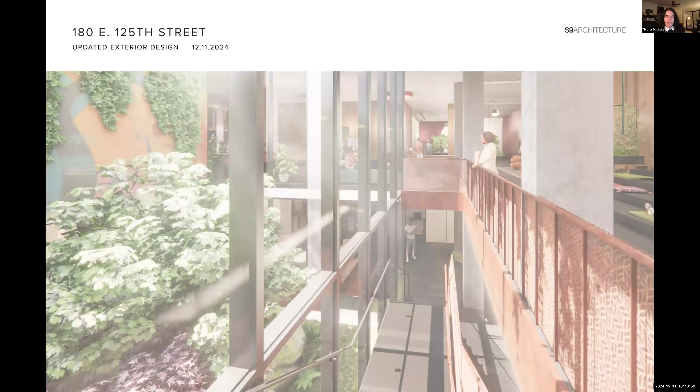Hopefully this is working. But yeah, we can see it. Okay, great. So we're very excited to be here tonight and to walk you through the design of where we are.

To locate ourselves, the site is on 125th Street, bound by 3rd Avenue to the east, bound by 124th Street, and the block extends between Lexington and 3rd Avenue. We're really in the middle of a bustling neighborhood here — restaurants, shops, cultural institutions, lots of residential, lots of foot traffic. So we want to respond to all these elements and think about how we design a building that has an identity and fits within the surrounding environment.

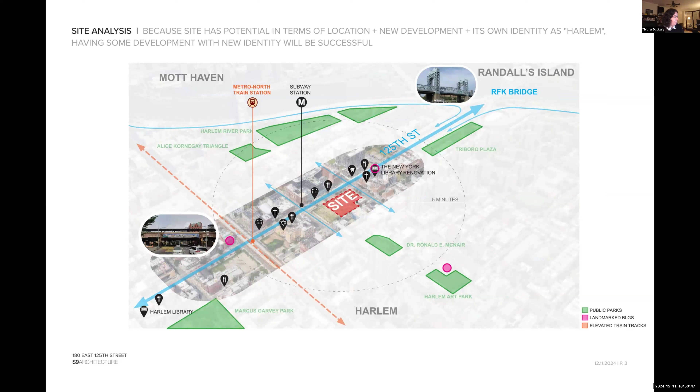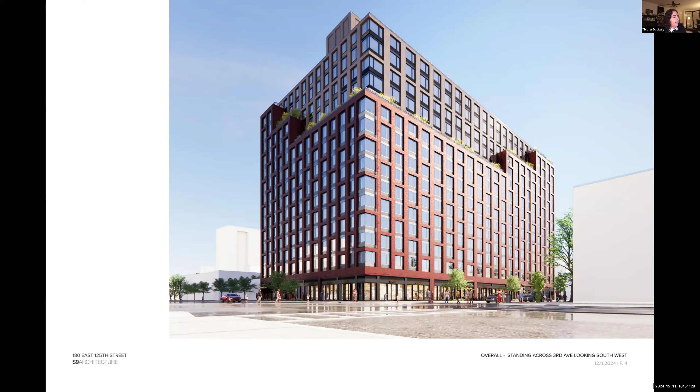Here is a view of what we came up with. This is an overall rendering standing on 3rd Avenue, looking south at 125th Street and 3rd Avenue. The facade is predominantly made of brick, and we're trying to express the energy and vibrance of the surrounding neighborhood by designing a pattern of dancing windows and stepped setbacks that wrap around the building.

Moving over, this is a view from Lexington, looking at 125th Street, looking east. Our site is adjacent to the MTA lot, so we're going to have lot line walls that will be exposed. We're looking to treat those lot line walls with artwork, large scale murals, and we're looking to commission local artists for this job so that we create walls that are additive to the neighborhood and the tenants within this community.

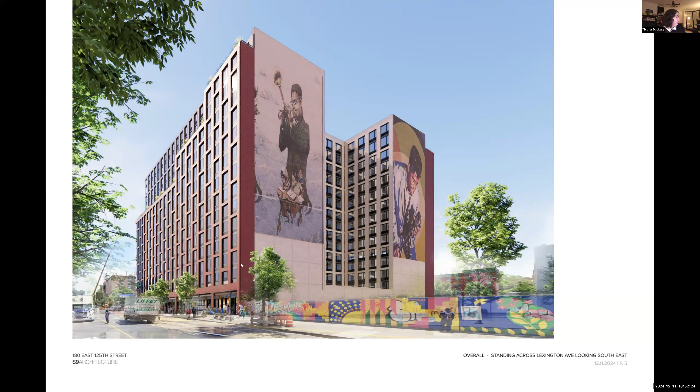Turning around, this is standing on 3rd Avenue, looking north. The corner currently has a 2-story fire department building. Here too, we have lot line conditions, and we're looking to treat these with murals commissioned by artists, if possible, as well.

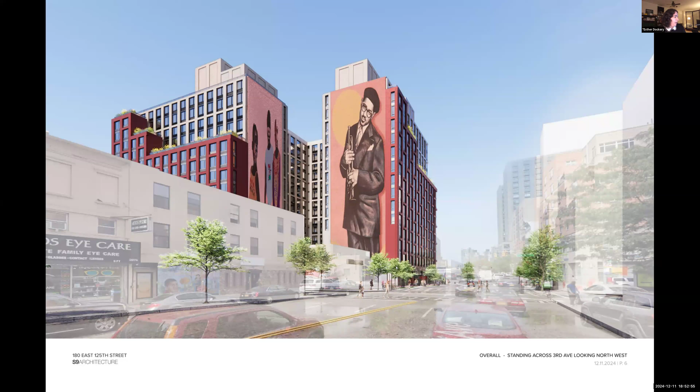Now zooming into the ground plane — the storefront is treated with metal paneling and lots of glass to create transparency. There's going to be signage across the street frontages and a louver band, and the brick piers will come down periodically to tie into the ground plane.

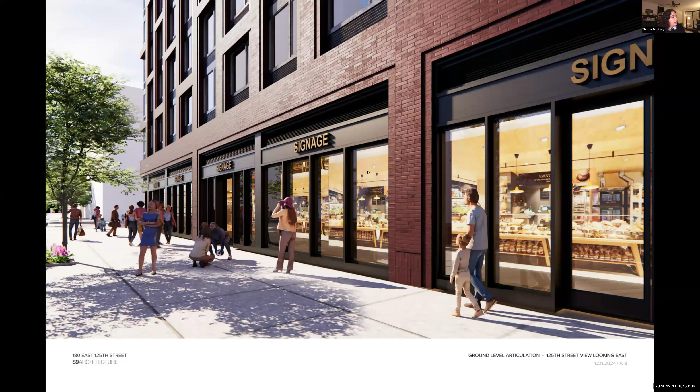Zooming into these storefronts, we're looking to articulate the detailing to create human scale. We're looking to create some setbacks and frame around the storefronts, play with the brick installation using soldier courses and stacked brick to add detail on the ground plane, and as we take the brick up the course of the building, we're looking to add detail in that way as well.

Further down on 3rd Avenue, the residential entry — we're looking to set it apart from the commercial portion of the building, make it distinctly residential, but still tie it into the rest of the design. We're considering including some landscaping to mark the residential entry, making it more private and distinguishing it from the commercial portion of the building.

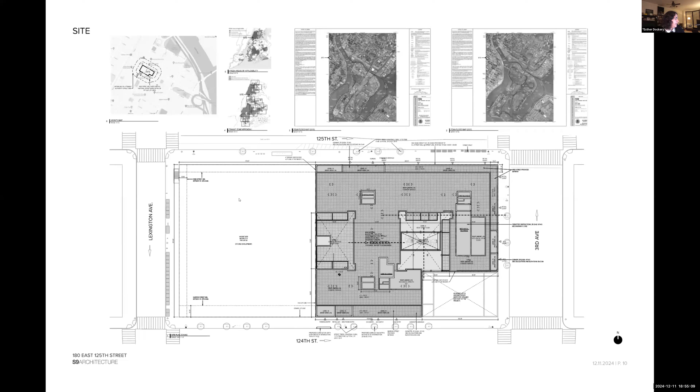Okay, next I'm going to walk you through the plans. This is a site plan, locating our project along 125th Street and the corner of 3rd Avenue. South is 124th Street. We have the 2-story fire department, and the MTA lot to the west.

Zooming in on the ground floor, along 125th Street we have retail, which wraps around onto 3rd Avenue. On the southern portion of 3rd Avenue, abutting the fire department, will be the residential entry. Part of the retail component will be a fresh food store, approximately mid-block on 125th Street.

The residential lobby and amenities are arranged around a sunken garden, located on the cellar level and open to the sky. This allows us to bring in a lot of natural light for the amenities and residents in the building.

Along 124th Street, we have the mailboxes and bike storage, service entry for the building, loading for the supermarket, and the ramp that leads down to the parking garage.

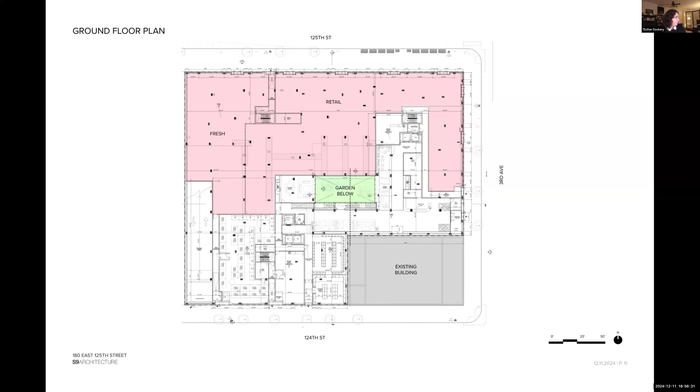Here's the cellar floor plan. We have attended parking of approximately 100 or so spaces. You can see the garden located at this level, open to the sky, bringing natural light into the heart of the building, with residential amenities arranged around it, as well as some back-of-house program needed for the residential.

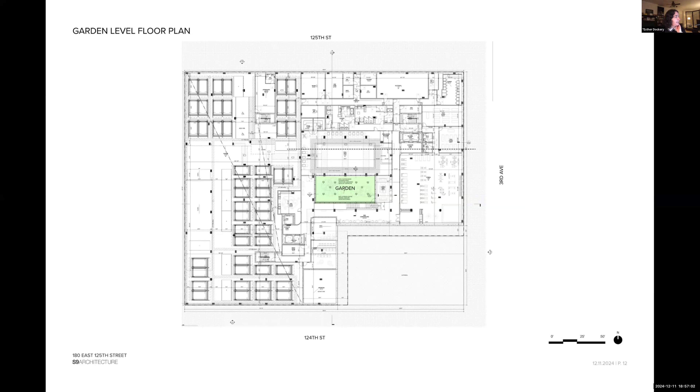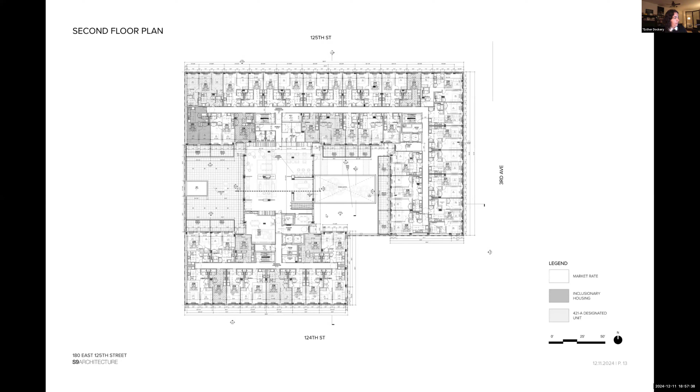Moving to the second floor, this is the first floor with residential units, located on the podium of the retail. It has a large amenity space with access to one of these terraces, and you can see the opening to the sunken garden. Residential units start on this level, and units here will have some private terraces on the podium level.

Moving up through the building, floors 3 through 10 are our typical floors. Highlighted here are the inclusionary housing units—I'll get into that in more detail when discussing the unit mix. The units are arranged around two courtyards, providing light and air. As we move up, the floor plate gets smaller as we introduce setbacks above the maximum base height.

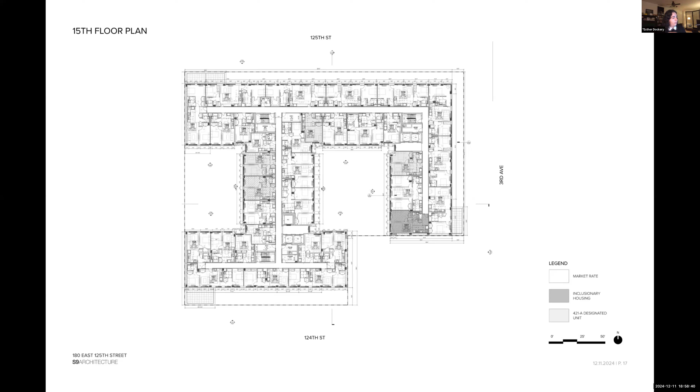Moving up further, this is floors 13 and 14, with additional setbacks. The top floor is the 15th floor, the smallest floor plate, but the inclusionary housing units are distributed equally throughout all floors, horizontally and vertically. Then we have the roof terrace with residential amenities throughout, as well as mechanical equipment as required for the building.

A snapshot of our unit mix: units are arranged within the 15 floors, on floors 2 through 15. We have a total of 614 units, of which 88 are inclusionary. It's a mix of studios, 1-bedrooms, and 2-bedrooms, totaling approximately 48% 1-bedrooms, 18% 2-bedrooms, and about 34% studios.

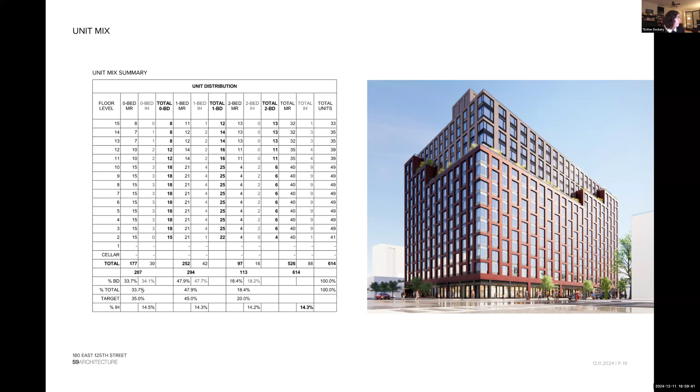And that concludes our presentation for today. With that, I'll turn it over to Jamal from the development team, and questions if there are any.

Just to give an overview, we're offering 185 total affordable units, of which 88 will be the inclusionary housing, set around the 70 and 80 AMI. To repeat: total affordable of 185 units out of the 614, and 88 of those will be inclusionary housing, set at the 70 and 80 AMI.

Thank you. Any additional parts of your presentation? Otherwise we'll turn to committee questions. Sorry, do you have any additional part of your presentation? Otherwise we'll just turn to committee questions. No, I could take any questions. Okay, thank you so much. Committee members, go ahead, thank you for your presentation.

I really appreciate the detailing on the building, it does make it feel human. I did want to bring up that when reviewing the plans, the 88 inclusionary units appeared to mostly, if not all, be interior facing. It seems like it would be more equitable to disperse them around so they have street facing views as well. We can definitely take a look at that.

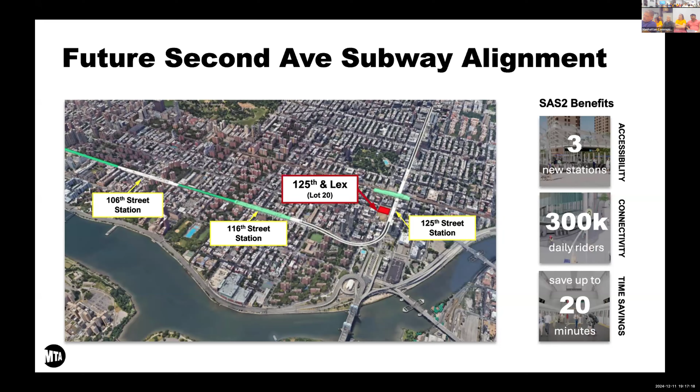That's really what my group does. We're investing quite a big sum of money, just under $7 billion, to build the Second Avenue Subway. What we want to do is not just build a subway, but also position our properties so that non-transit uses can come in next to them and over them.

We're also looking to engineer these structures so that we can build over them and next to them in the future. Right now we're working with our engineers to redesign these facilities where they need to be so that we can put housing and jobs next to them. Right now that's really what I'm here for — to look to entitle these properties, or get the zoning in place, so that we can move forward with future development, which won't happen for a number of years. So we don't have as many pretty renderings as the last presentation, but we want to show you kind of what we're thinking in terms of the massing.

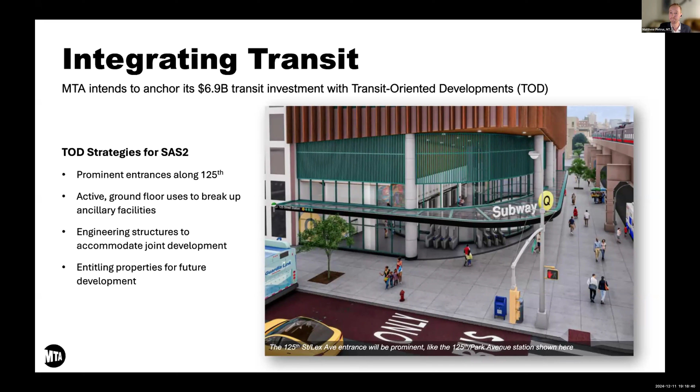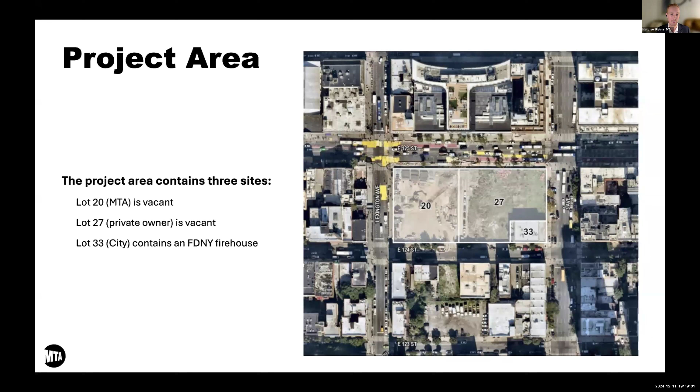So here's an aerial of the project area. I think most are familiar with the site, but this is on the west side of the block, bound by 125th, Lexington, and 124th. Lot 20 is vacant. Lot 27 we just saw a great presentation on, and lot 33 is the city-owned firehouse.

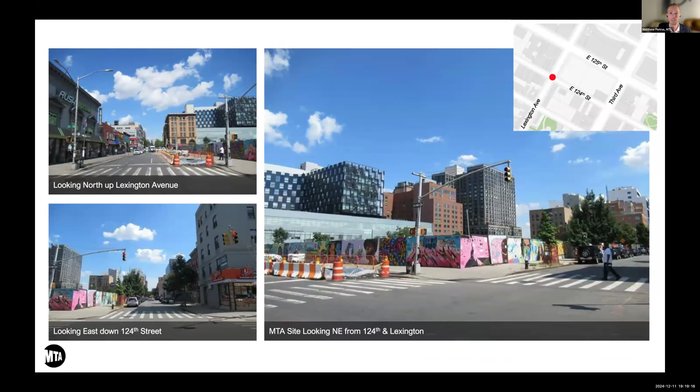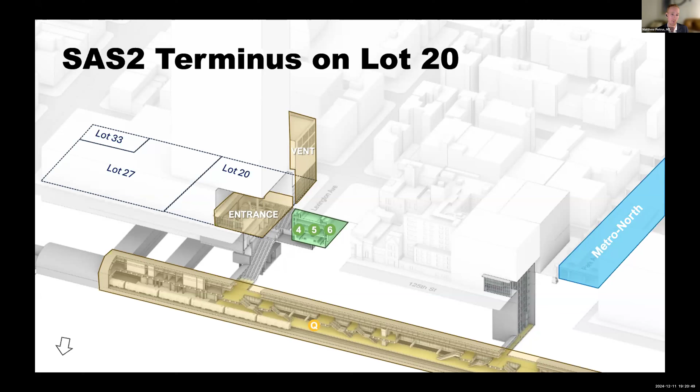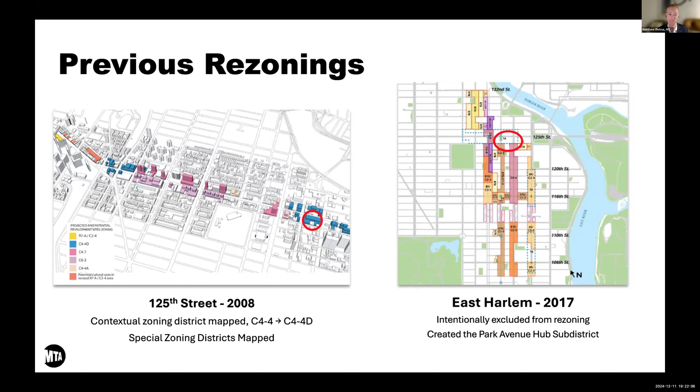Then in East Harlem, this site was not included in changes of density. Really, as I recall and as I've read in the approvals, and as I worked on East Harlem myself, it was to try to preserve the Pathmark site from closing, which ended up happening anyway. So now we're looking to up that density there, not just because it's new density on the site, but most importantly because we're going to be adding a significant amount of transit. When you pair high density residential and jobs around transit, it just results in better outcomes for neighborhoods.

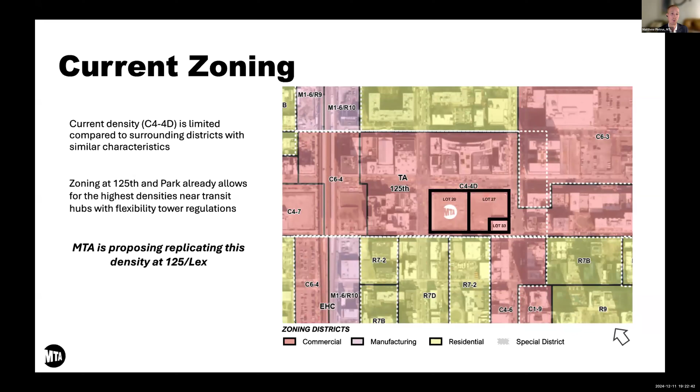So here's the current zoning. As I mentioned, it's contextual, but what I want to point out is that just less than a block to the west, you can see where it says a C6-4 district. This was mapped during the East Harlem rezoning. It was a higher density site, and it's really to say, look, there's a lot of transit around this space, there's a viaduct here, this site can handle density. So those three block faces fronting on 125th and Park have that higher density, and what we're looking to do is replicate that density at 125th and Lex.

So this is the most technical slide. What we're proposing now is not yet in public review, we're months away from that. We just wanted to introduce the project to the community board.

What we would do is change the underlying district from C4-4D to C6-4, the same district that exists just a block away, and also write in a new sub-district. This is where special district regulations help create bulk that's sympathetic to the surrounding neighborhood character. We'd use the same regulations already in place: a minimum base height of 60 feet along 125th and 40 feet elsewhere, and a maximum base height of 85, keeping the base of the building lower and more in context with the surrounding medium and lower rise buildings.

Also mapped in that Park Avenue district where the C6-4 is, are tower coverage regulations. In zoning, tower coverage means you don't really have height limits, those are dictated by different rules. But on this site, because of our proximity to LaGuardia - which isn't far away as the plane flies - we're capped at about 400 feet. So what we're going to show is a building that's actually below that flight path.

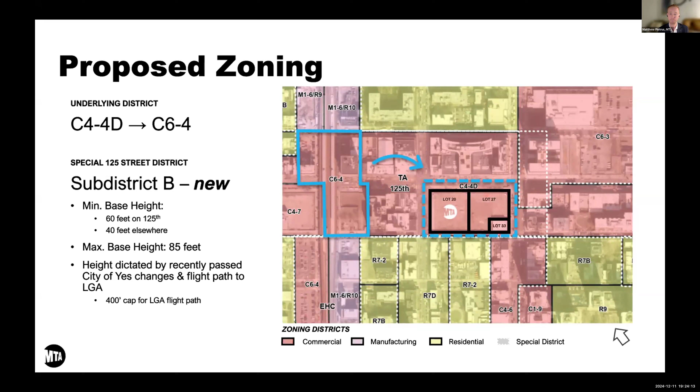So here's what the project is. This presentation focuses on what the MTA will be able to do on its lot in the future. The density we'd look to put in via zoning would result in over 540 units, and up to 160 of those units would be affordable. Something we want feedback from the community board on is what levels of affordability you'd like to see here.

Some folks might be familiar with MIH options. When we do this rezoning, we are mapping MIH as well, so any development on our lot in the future will have mandatory inclusionary housing. Whether that's 20%, 25%, or 30%, we want to hear from you on what that is and what those corresponding bands would be. I can talk through what we were thinking in the Q&A.

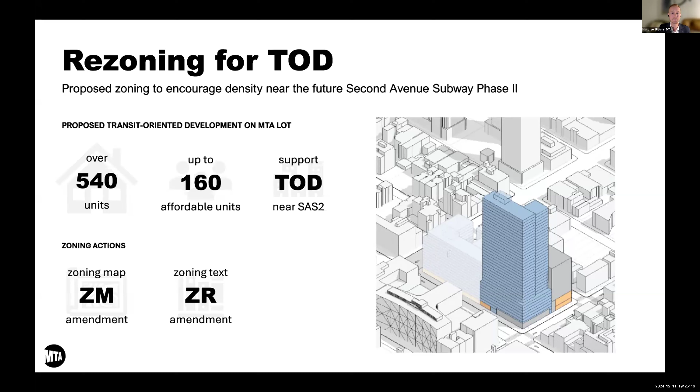This is just a massing, not exactly what the building will look like. It's not going to be blue like this, and the form may change a bit. But just so you get a sense, this rises to about 38 floors, and I believe this one is about 385 feet as currently massed.

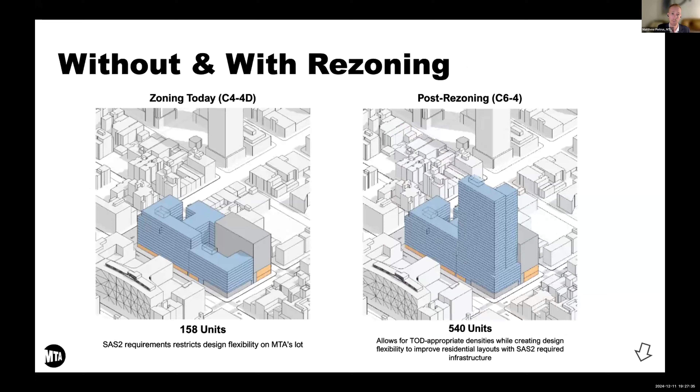For environmental review purposes, I don't want you to see this scary looking diagram on the right later and be alarmed. For purposes of environmental review, to be most conservative and understand the impact of the rezoning, we study what's called the reasonable worst case development scenario - the tallest buildings, the most density, the most retail, the most of other development programs. So this zoning diagram is what we're actually going to study, to understand those impacts. But in reality, what we'll probably see is what exists here on the right, post-rezoning. I wanted to flag this just in case later you said I lied to you, that these are much bigger buildings than anticipated - this is just the zoning envelope, and I'm happy to talk about those technicalities later.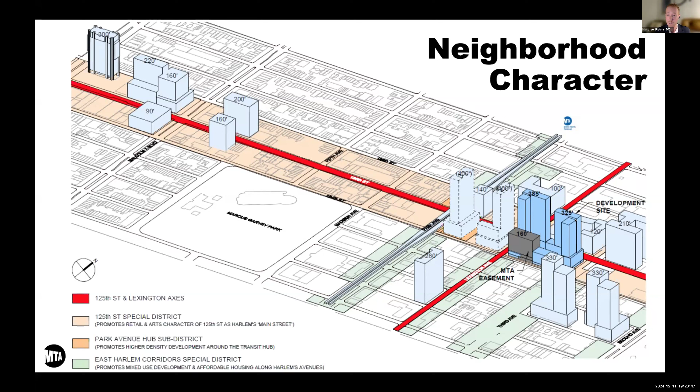So you might be asking, why are you coming now? You may have heard 2032 is when we're looking to open up 2nd Avenue subway. That's quite a ways off, and we're the MTA. Our first and foremost priority is to make sure that we can move New Yorkers around New York. So what we're doing now is entitling the property.

We are looking to certify in May, so that's the official public review. But then following that, we would need to continue coordinating with our engineers to design our facilities so they can accommodate this development.

But then significantly, we also need to go through another process at the state and federal levels, because we have federal dollars for this, to make sure that whatever we're planning on building there that is non-transportation use doesn't impact the transportation use. That is something that takes a long time, and something we need to have the city approvals in place before we can even start that process.

So at the very end, after the 2nd Avenue subway opens and we are all riding that Q line together, that's when we would look to construct this transit-oriented development. That would open in 2035 is what we're anticipating.

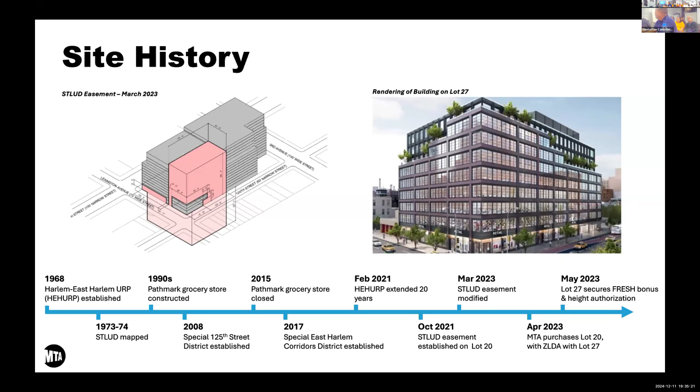Is it the MTA that's going to act as developer, or does that property get turned over to a developer who then develops it? And does that developer have to adhere to any of MTA's recommendations, or is that now subject to ULURP as well?

We build subways, but we partner with the private sector through a similar process that the city follows, in terms of requests for proposals. So prior to 2032, probably 2031, you would see a public issuance of that RFP go out. We would say this is the site we want to develop, here's the criteria, and we would name certain criteria in there. Then we would get back bids from the private development community that maximizes our revenue. I should note that we are 100% supportive of affordable housing, but one reason we have a double bottom line for these transit-oriented developments is, first, we want development next to our subway system throughout the region. Second, all of that money feeds back into our capital program. So we use these to leverage the dollars we can make on our property, and we put them right back into the public system.

So it's a longer way to answer your question, but you wouldn't actually see this in ULURP for the disposition, because the MTA is not subject to ULURP when we dispose of our property. That is subject to our board though, so those RFPs would go to our board. You would see what that designation would look like. But again, that's a process that would take place in about 7 years from now.

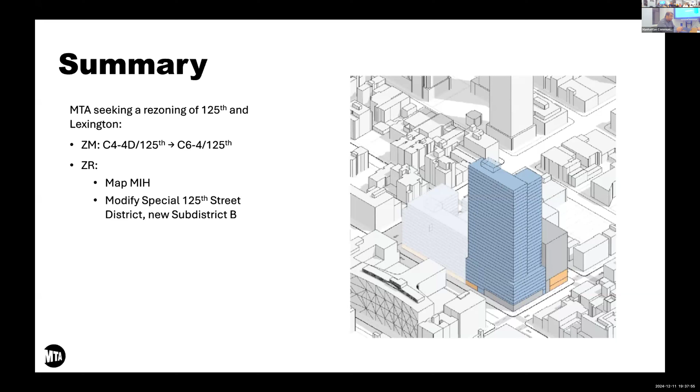I got it. Thank you so much. Thank you, and I just want to remind folks too that this is pre-ULURP, so we'll have a lot of time to go over this project, to review it, to scrutinize the project.

So I do want to push things along, but before we do, did George James have a question in the chat? So, you know, if you're doing this as a sub-district in a special district, that means you have the zoning mechanism to define your building envelope more carefully than what you showed in the environmental review. You were showing a 155-foot street wall in the reasonable worst-case development scenario. You don't have to do that. You could write an 85-foot street wall into the sub-district special district.

And George, I knew you were going to catch that. That's an error, it is 85 feet. I was reading that slide and I was like, oh, it's way too big, George is going to raise his hand. It is 85 feet, you're 100% right.

And again, yeah, it is a sub-district too. And so if there are requirements you'd like to see, that tinkering here and there, we're absolutely open to hearing those out. Great, because if you have that mechanism, there's no reason to oversize it. You can actually make it what you want it to be and write it into the sub-district. So thank you for that.

I do have one brief other question. This block is one zoning lot except for the firehouse, is that correct? That's right. Okay, thank you.

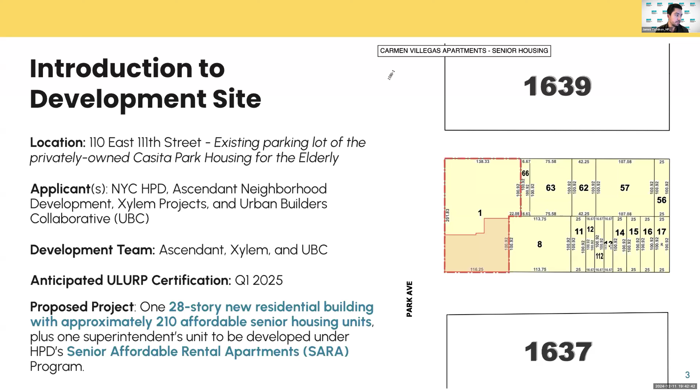The applicant team for this ULURP will be HPD, Ascendant, Xylem Projects, and the Urban Builders Collaborative, which is the development arm of Latier Construction Corp. The development team is also comprised of the aforementioned organizations. HPD and the development team are anticipating ULURP certification in the first quarter of 2025. The proposed project will be one 28-story new residential building with approximately 210 senior housing units, plus one superintendent's unit, to be developed under HPD's Senior Affordable Rental Apartments program known as SARA.

Here's an aerial view of the site for a little more context. The current tax and zoning lot encompasses the entirety of Lot 1, highlighted in blue, where Casita Park is located. The development site, highlighted in red, will be using development rights from the entire zoning lot to achieve its height and floor area. The proposed project is located on the corner of Park Avenue and East 110th Street, to the north of the NYCHA Clinton houses.

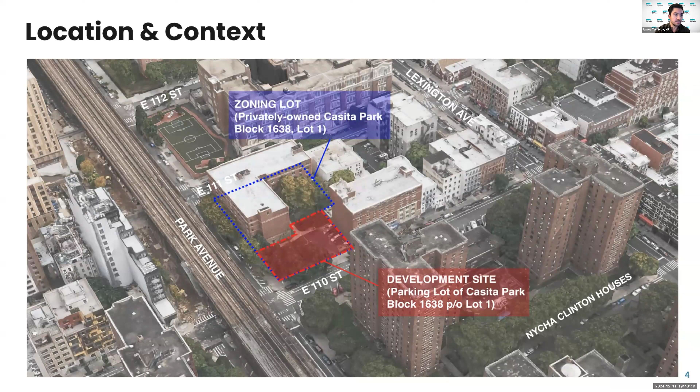To facilitate the proposed project, the applicant team proposes the following land use actions. HPD proposes to acquire previously city-owned property on block 1638, part of lot 1, the development site I mentioned. This property in its entirety was previously conveyed to Ascendant through a UDAP action in the year 2000 for the development of Casita Park, and we will dispose of the development site on that part of lot 1. Ascendant, Xylem Projects, and Urban Builders Collaborative propose to rezone the area highlighted in the dotted black line to an R9-1 district, and a zoning text amendment to map in mandatory inclusionary housing, or MIH, area.

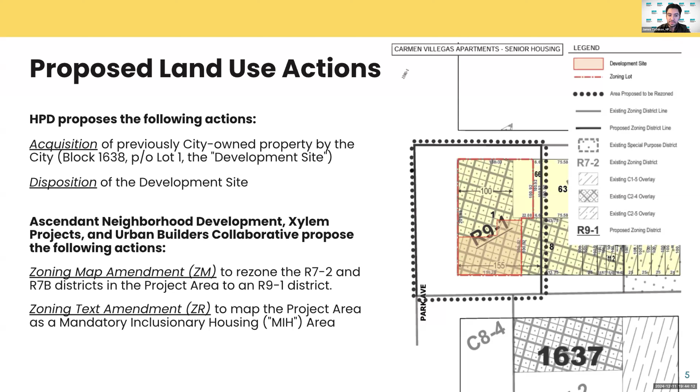Now I'll turn it over to the development team, who will introduce themselves and speak in more detail about the project.

Good evening, Community Board 11, coming to you from Latier Construction's offices over on 110th Street between 1st and 2nd. Nick and Gerard have been over here for 45 years. I'm a partner with them in Urban Builders Collaborative, filling in for our fearless leader, Chris Cirillo from Ascendant. Ascendant has been a community partner for decades. They own 28 buildings with approximately almost 700 apartments, all affordable, with a significant pipeline. You're familiar with Beacon that recently came before you. And our other co-development partner, a certified M/WBE, Xylem Projects - Nana Lynch, the principal, brings a tremendous amount of experience from the Bloomberg administration and then commercial real estate finance, and has been a critical piece to get us to where we are today.

Let's keep it moving. As discussed, the project overview: 210 affordable apartments, 100% affordable, 100% senior. Some of the amenity spaces: 2,000 square feet of indoor space, the laundry room, community room, and exercise room on the 6th floor, which we'll have a separate slide on. You'll be able to see 2,800 square feet of outdoor amenity space, including an open corridor between the Casablanca Meat Building on 110. We're calling that Salsa Way, and it'll be a great feature for the residents of the building.

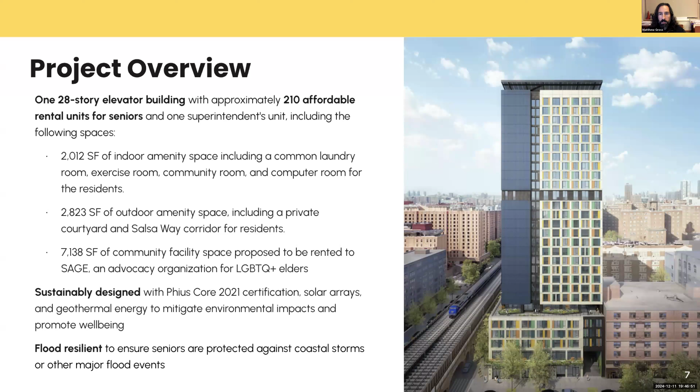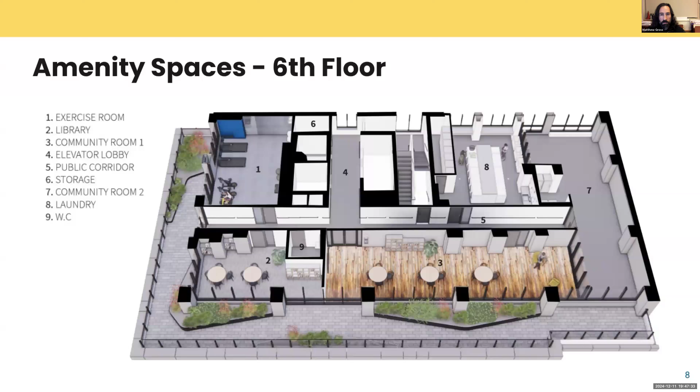70% of those apartments are up to 50% of the area median income. There is no minimum. Folks can come in with no income, or they could just have supplemental security income or other government subsidy. So there's no minimum, a question we get asked a lot, but the maximum would be up to 50% of seniors' incomes.